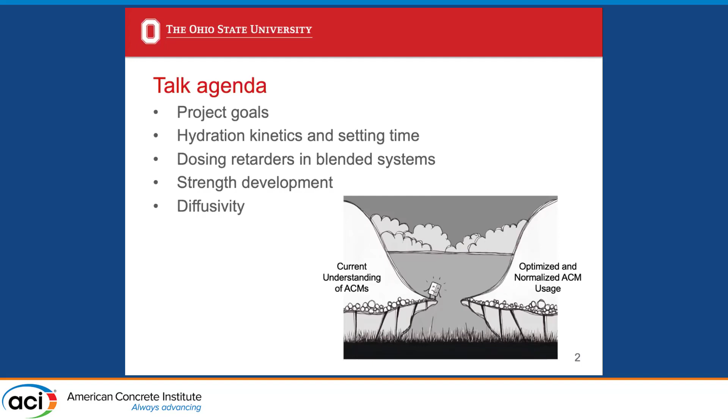My hope through this presentation is to continue building a bridge between where we are today with our current understanding of ACMs and in particular calcium sulfoaluminate cements and a place where we can have an optimized and normalized usage of these materials. I see these materials as a tool in the toolbox for increasing the sustainability of our concretes.

I've shown here some data adapted from Gartner 2004, where he showed that you can obtain as much as a 45% reduction in associated embodied CO2 with calcium sulfoaluminate and belitic calcium sulfoaluminate materials when used in a 1-to-1 ratio.

But in addition to that sustainability, calcium sulfoaluminate cements have a lot of benefits. Most predominantly, they're extremely fast setting. As Cameron mentioned earlier, you can obtain set in as early as 5 to 10 minutes without retarder. And along with that fast setting time comes also high early strength gain rates. So we can use these materials to accelerate construction schedules and perform rapid repairs.

There are a lot of challenges associated with this material because it's not been used as prevalently as OPC, so we don't have that giant knowledge bank in most of them. And some of the challenges are associated with that fast setting benefit that we've just talked about, because it can become an impediment to construction. If you have to get your concrete from a batch plant to a site, you're going to need more than 5 to 10 minutes to do that.

And similarly, if you're placing a large amount of concrete on site, you'll need a way to delay that setting time. So we need to build out our resources for controlling these reactions and giving us enough working time to place the material. CSA cements also, because of their high alumina content, do have a higher cost than OPC. And so that can kind of prevent some users from wanting to use this sustainable material. And then finally, there's a large amount of unknowns regarding durability with CSA cements.

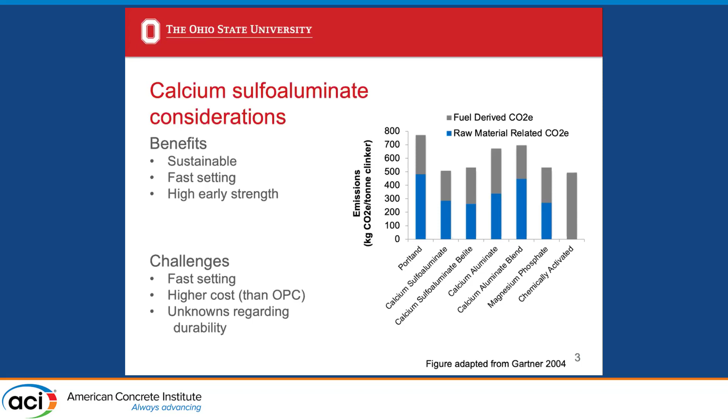So our hypothesis was that perhaps we could address some of these concerns through the use of a CSA OPC blend. So our idea is to maintain that fast setting time and early strength development, but use the OPC to dilute the system and enable us to extend our working time. Similarly, perhaps we could go the opposite direction, use CSAs in small proportions to provide alternatives to chloride-based accelerating admixtures. So we could get an early set time and early strength gain without adding chlorides to our system.

We also, when doing that, can maintain some of the sustainability gains associated with CSA, albeit in a lesser amount than if we use a 100% CSA mixture. It'll be more akin to the sustainability gains that we get from use of SCMs, which are used to substitute out a proportion of the OPC rather than the full OPC content. And then finally, by lessening the proportion of CSA in the mix, we're going to reduce the total cost of using that material while hopefully maintaining some of the benefits.

There is some challenge with using CSA OPC blends though as well. We really have very little published data on this material, although I'm hearing that it's used fairly frequently on an industrial scale. And so some of the knowledge needed to choose the correct proportions and to understand what the effect on setting time and strength development and durability is quite limited. So we hope to fill in a little bit of that information in this presentation.

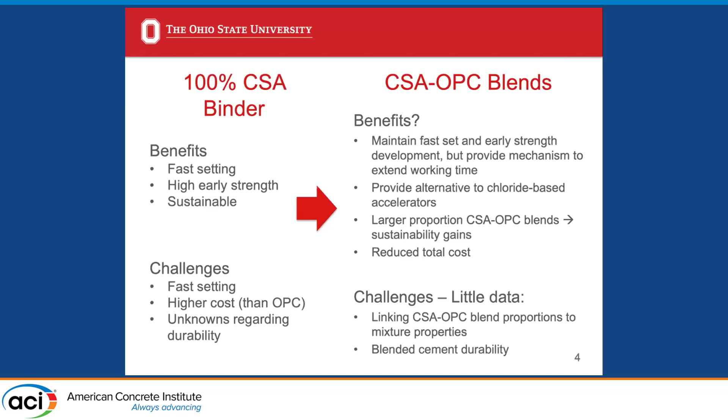So Cameron was talking a little bit about different types of CSA. I've shown the 4 proposed types of CSA on the screen here. The one that we used in this study is most akin to a type A accelerating additive. So this is a type of cement with the highest proportion of yeelimite, just shown in the first column here, which is the fastest reacting and most reactive component within the CSA cement system.

The cement that we used, I incorrectly titled my talk, and it's not actually a BCSA, it's just this type A cement. I do also want to highlight how we've named things moving forward in this presentation. Whenever I have a 100% OPC or 100% CSA system, I tried to call them OPC or CSA, but all other blended mixtures are shown as a proportion of OPC to CSA. So this 90-10 mixture is 90% Portland cement, 10% CSA.

We cast our mixtures, you can see the mix design quantities on the right side here, with a pretty low water to cement ratio. Previous CSA diffusivity literature had indicated that you get much better performance with CSAs at slightly lower water to cement ratios than what you could use with a Portland cement. So we wanted to start out on a good foot as far as durability, with a little bit lower water to cement ratio. As you can see from the chart here, we were able to obtain pretty good workability through use of a superplasticizing admixture, and we did successfully air entrain all of our concretes.

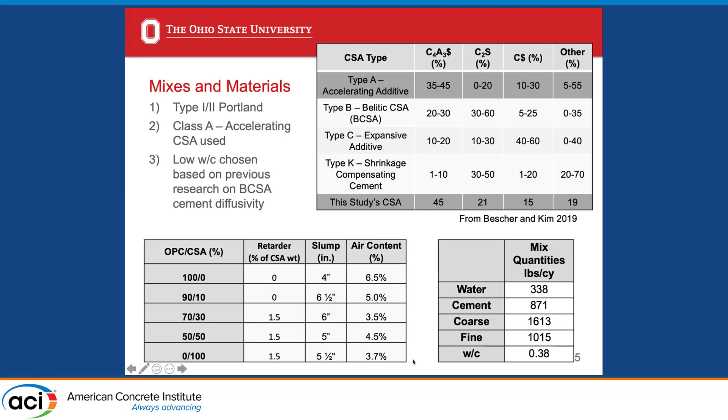So first, let's look at the effect of these blends on setting time of our mixtures. We'll focus first on the isothermal calorimetry plot at the bottom of the screen. And what we can see is our OPC shown in black, and it has a pretty low heat release compared to all of the blended cements and a significantly longer setting time. So the time to reach our maximum rate of heat release with the OPC was a little over 6 hours. Whereas as soon as we started substituting out OPC for CSA, we significantly shortened that time. So we went from about a 6-hour max rate of heat release to about a 4-hour max rate of heat release with only 10% CSA added to the mixture. We continue to see additional acceleration through use of higher CSA components.

And this translated as well to our Vicat setting time, shown in the top of the screen. So by using a 5% substitution of CSA, we reduced our initial set time by 33% from 203 minutes to 136 minutes. And we reduced setting time by 87% by increasing that CSA percent from 5 to 10%.

So a couple things that we noticed from this data is that if you are trying to use CSA simply for the accelerating portion, you probably don't want to use greater than 10% CSA in your mix. We didn't really see much in the way of acceleration at greater levels than 10%, primarily because the set times became so incredibly small. Everything 15% CSA and above was 16 minutes or less to initial set time. And so actually what I would recommend is at 15% CSA or above, you actually employ use of a citric acid retarding material to delay that set time a little bit, whereas we can obtain those accelerated and yet maybe not too accelerated results with CSA at lower proportions.

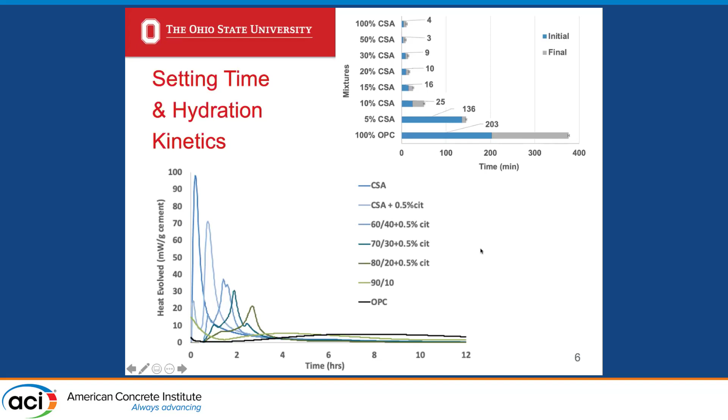Speaking of setting time and retarder dosage, we had struggled a little bit in figuring out how to actually calculate the dosage needed to obtain good setting times for these mixes. We started out, well, let me back up a little bit. You can find in literature the effect of citric acid on OPC cement, and it is a very, very effective retarder. A 0.5% by mass dosage of citric acid in 100% OPC mix results in 160 hours of set time delay. So we were a little bit nervous that if we used more typical retarder dosages in a CSA OPC blend, we would end up with an almost never setting mixture.

And so we started out dosing our retarder based on CSA weight, and that seemed to work fine for our 100% CSA mix and for our 50-50 CSA OPC mix. But when we went to smaller percentages of CSA and larger percentages of OPC, the relationship between retarder dosage and initial set time changes radically. So we went back and tried to rethink this a little bit.

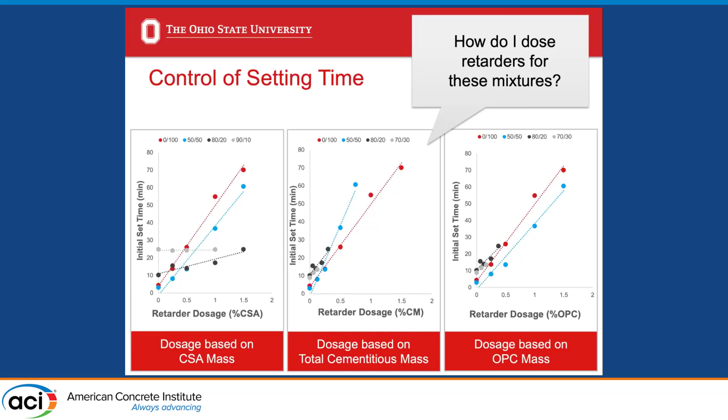And I've shown here retarder dosage based on total cementitious content relative to the initial set time. And you can see that things align a lot better when we normalize by total cementitious mass. And the results are even more aligned when you normalize by just OPC mass. So we have more predictable results when we proportion retarder based on the OPC percentage rather than based on CSA mass or total cementitious content.

Right. So at the beginning, I postulated that perhaps we could use CSA as an accelerating admixture, and this slide shows the results of that. And what you can see is we were not able to obtain the 4,000 PSI rapid repair conditions that we had hoped for in this mix, but we can see that with increasing amount of CSA, so we go from 0 CSA at the top to 100% CSA at the bottom, it's quite linearly related how much CSA you have versus the rate of strength gain initially.

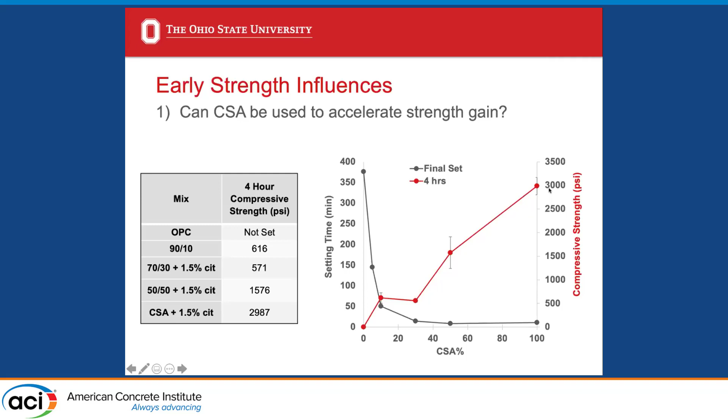So we see a pretty linear relationship, except for this one hiccup, between CSA percentage and initial strength at the 4-hour time period. This increased rate of strength gain does not continue to 1 day though. By 1 day, we see that the OPC and the CSA-OPC blends have pretty similar strength gain. Although the 100% CSA mix has exceeded the strength of all of those mixes significantly at 1 day, reaching about 6,000 PSI compared to 4,000 of the other mixes.

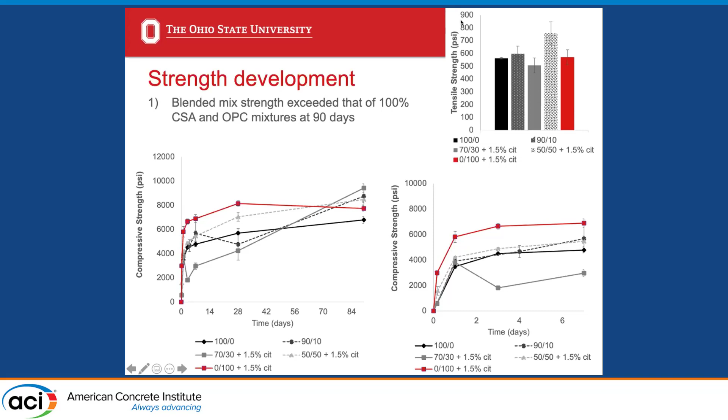However, over the long term, we see sort of a flip-flop in that relationship. Our CSA stops gaining strength at about 28 days and starts to actually lose a little bit of strength or stay pretty consistent. Our OPC continues to gain strength, and our OPC-CSA blends gain quite a bit more strength over that time period. In the end, the blends ended up with strengths between 8,000 and 10,000 PSI, whereas the CSA and the OPC mix were between 6,000 and 8,000 PSI. So there could be some compressive strength gains to be obtained from using these blended materials. And we saw similar performance at 28 days on tensile strength of all of these mixtures.

And so finally, we did an assessment on durability, focusing in on chloride diffusivity. And so we looked at only a couple mixes. This work is quite a bit more involved. And so we assessed OPC, a 100% OPC mix, the 100% CSA mix, and a mix that's 50-50 of each of those materials. And overall, what we can see is that the OPC and the blended mix performed very similarly, and the CSA had slightly better performance at 28 days. And the diffusion coefficients as well are shown below. We see pretty similar performance from the OPC and the blended mix, and slightly better performance from the 100% CSA mixture.

I've also provided you here a little bit of an overview of most of the diffusivity data that I can find published at this time compared with our results. And there's a couple things that we can get from this chart. First, we see that the CSAs and OPC blends have relatively similar performance. At 28 days, the Behravan study showed a slightly reduced diffusion coefficient for the CSA mix, but they actually tracked changes over time, and by the 56th day, the CSA was performing much better than the OPC.

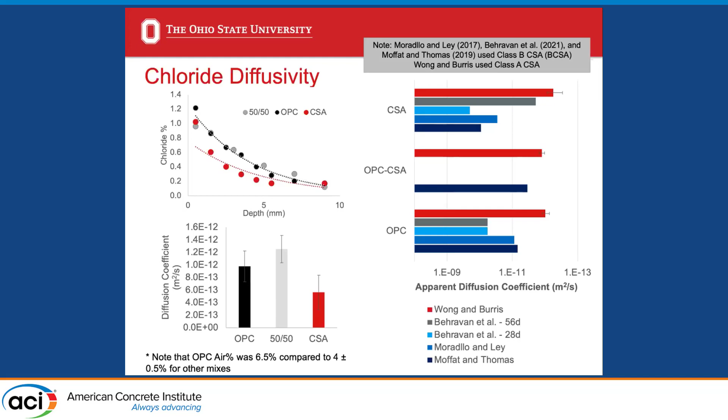And we saw similar results in our study with slightly improved diffusivity in the CSA mixture compared to our OPC, and then that OPC-CSA blend has, again, a similar performance, although in our study a little bit greater diffusivity than the CSA alone mix. And I should note as well that all of the other studies shown here are the Class B CSA, the belitic CSA cement, whereas ours is that Class A. So they're a little bit different materials, hence the different behavior.

Great, so the main takeaways from our study: we definitely can use CSA as an accelerating mineral admixture. It will accelerate both our setting times and our initial strength gain rates. Use of higher proportions of CSA will increase the rate of acceleration. But if we are not careful, we may then need to go back and add in an additional retarder to control that setting time. Dosing of the retarders is most consistently done based on the amount of OPC present in the mixture rather than total cementitious content or CSA content. And finally, we found that CSA-OPC blends obtain satisfactory strength and durability relative to OPC, and maybe in some cases improved performance.